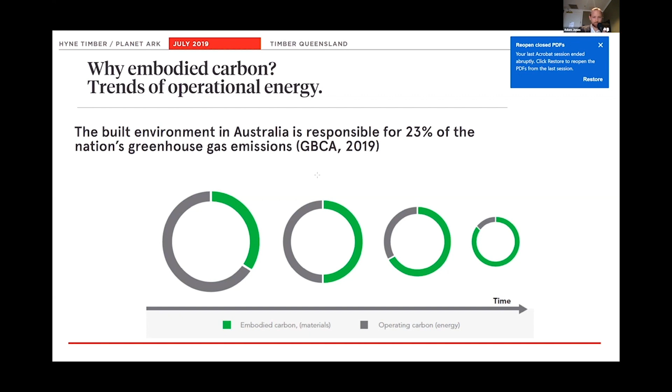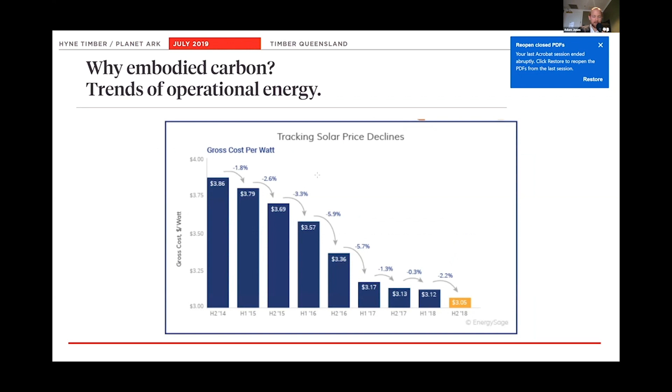So this is another graph just showing the cost of solar going down at an exponential rate, which is allowing for really efficient buildings for energy. And as you can see here, the operations are going down and materials is kind of staying the same, or in some estimates is actually increasing going forward.

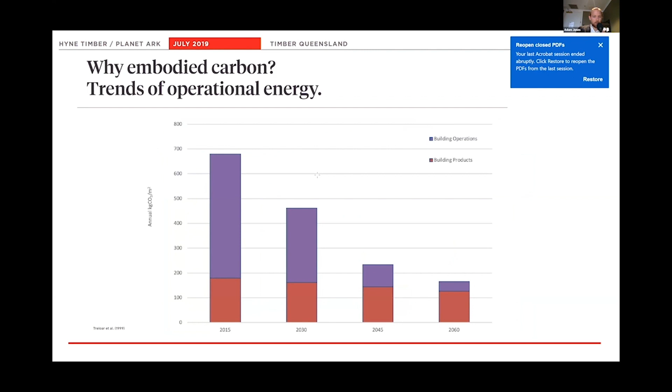So at the same time, we need to find land or build houses for 2.4 billion more people. And as David mentioned earlier, a high proportion of that is going toward our cities.

So in terms of what this looks like, in 2010 we got about 141 billion metres squared. We need in total 133 billion metres squared worth of additional housing. So that's a lot of structural materials that we need to find to house the growing population.

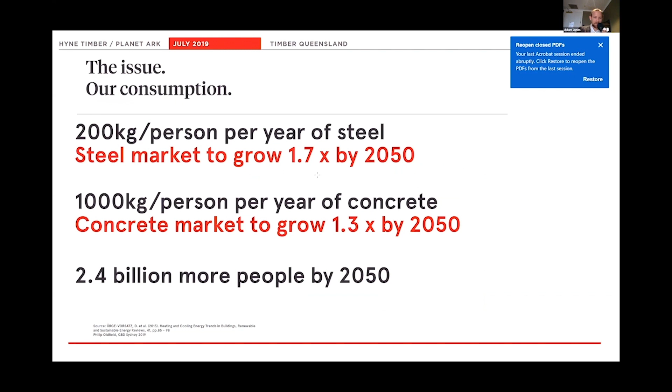So structural materials, it's something that we don't really think about in terms of our own consumption. Steel and concrete is growing at a very fast rate. Every single person on the planet uses about 200 kilograms per year of steel and about 1 ton of concrete per year as well. So we are very reliant on these materials at the moment, and the impacts of these materials are only just going to keep on increasing going forward the way things are moving.

And I think the biggest difference when it comes to solving the problems of operational energy compared to embodied energy and structural materials is that we're getting all the solutions for energy from the sun. Every single second of the day, the sun is giving us more energy than we could possibly handle. But when it comes to our materials, we only have the earth to actually source it from. So this is, I think, going to be where most of the challenge is in terms of sourcing our materials sustainably.

And organisations around the world are beginning to incorporate embodied carbon into their longer term visions when it comes to sustainability. Historically, the focus has only been on energy, but right now they're incorporating embodied carbon into their definitions.

If you look at the context of other materials and what some of the solutions might be to getting to a low carbon future, I think the lowest hanging fruit we should all be looking at is simply designing more efficiently.

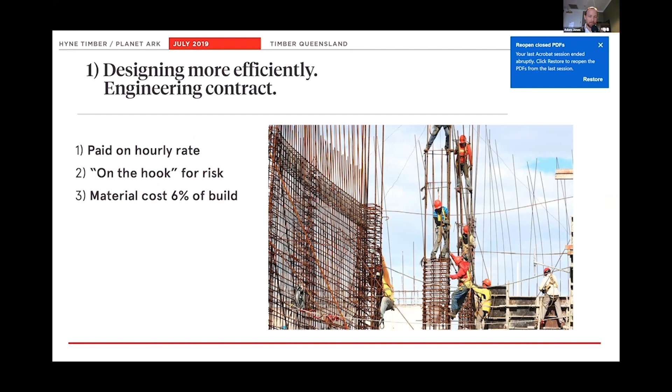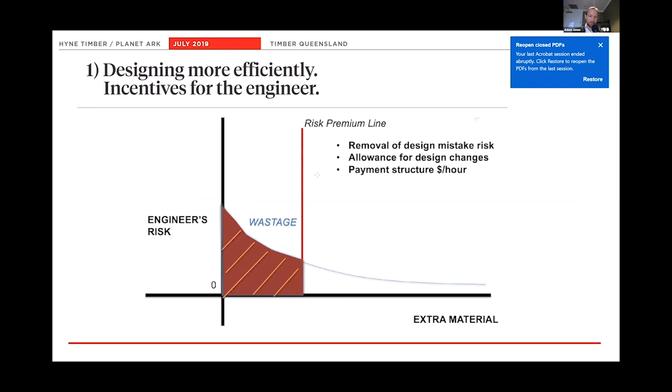As we put more material into the building, our risk as an engineer goes down substantially. And when we account for the allowance for design changes and the payment structure I mentioned, there's a lot of wastage in terms of materials that goes into our buildings.

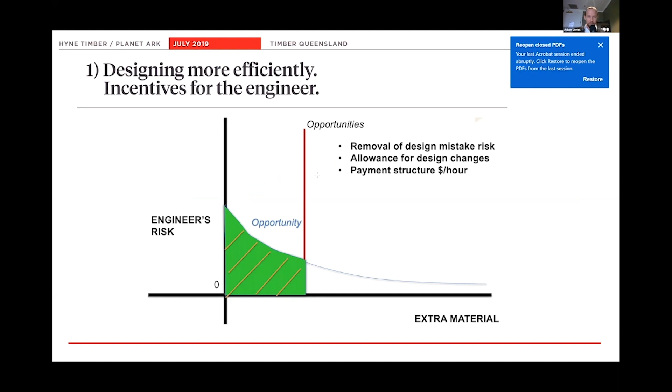At the same time, this is one of the big opportunities, because if we think about utilizing much more computers to do the computations, this is where our lowest hanging fruit in terms of savings can be for our embodied carbon.

Traditionally an engineer would just do hand computations for every single element. With this, you can utilize it to do the design for the engineer, meaning if the architect moves the pitch by just 1 degree, all the computations automatically update.

And timber is in a very good location for this, because things like Grasshopper can speak very well with the CNC machines that cut timber for prefabrication, to be able to deliver it on site.

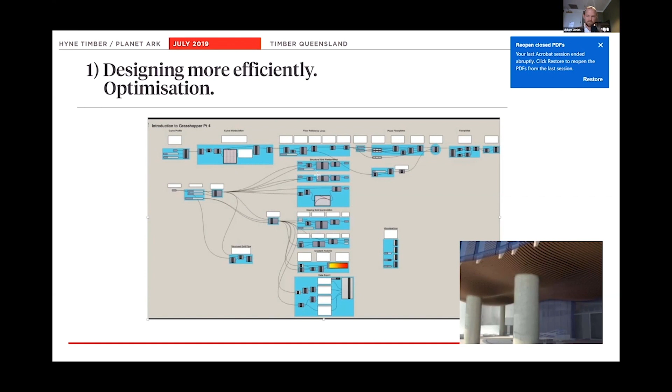When we're looking at concrete specifically, it's 8% of the world's emissions. It's more than the cars on our roads, and we have a huge demand for it, and it's going to be difficult to replace in some elements.

I've got this image here of the future train network of Melbourne, and a lot of these are new railway and new pieces of infrastructure that need to go ahead. On the right-hand side here is another big challenge we've got.

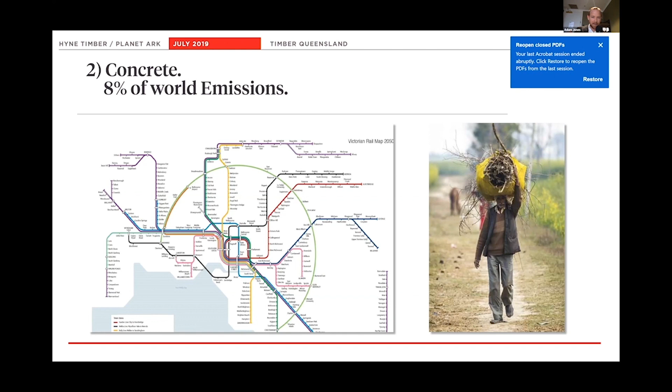Every single time we bring someone closer from poverty to our standard of living, there's a lot more emissions associated with that. I personally feel uncomfortable if we allow other people to live in poverty because they want to aspire to have the lifestyle we have. So this is one of the challenges in terms of the values we need to balance moving forward.

Looking at the chemical reaction of concrete, 32% of it is generated in the creation of heat to turn limestone into lime. And the big one here is that carbon dioxide is released in the chemical reaction, so that's 55% of the emissions.

And it doesn't matter how much we optimize this process of creating concrete, there's always going to be 55% of the greenhouse gas emissions that's released.

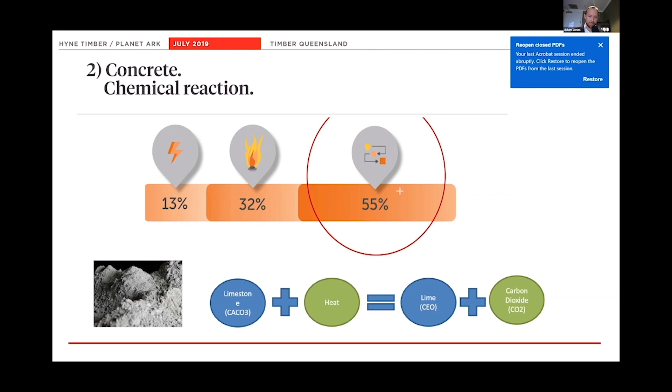So for concrete, which is this big issue moving forward, there are two minor solutions: geopolymers and supplementary cementitious materials. But again, if we're using fly ash, and in Australia, especially Victoria, we've got a lot of fly ash sitting there, these are also non-renewable resources. So these can help to a point, but eventually we're going to run out of the supplementary cementitious materials.

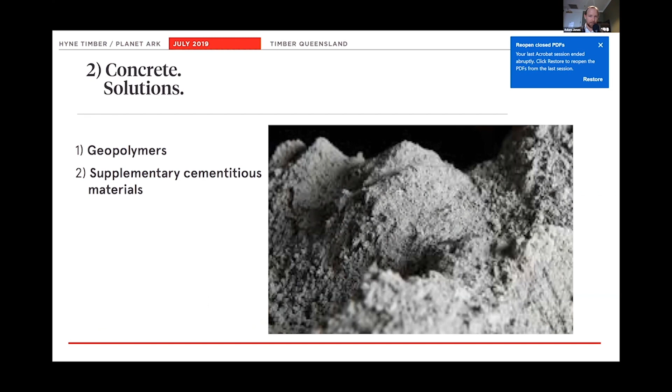And a similar story with steel. With iron oxide, we use heat to release the oxides off the iron, and then CO2 is released again in the chemical reaction.

It doesn't matter how much renewables we use for the generation of heat, there's always going to be a minimum amount of CO2 emitted in the creation of steel, which again goes against our longer term goals of the Paris agreements, or also like the Green Building Council's new carbon roadmap and so forth.

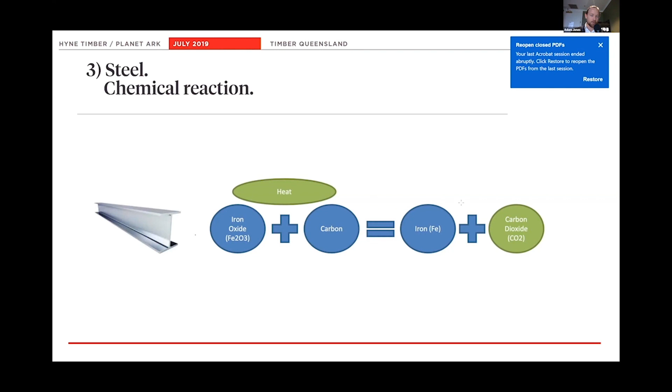So with steel, there's no real significant solutions out there. There's one somewhat speculative, very early technology, and that's using hydrogen to release the oxide from the iron. So then you use iron, and the byproduct's just water instead of CO2.

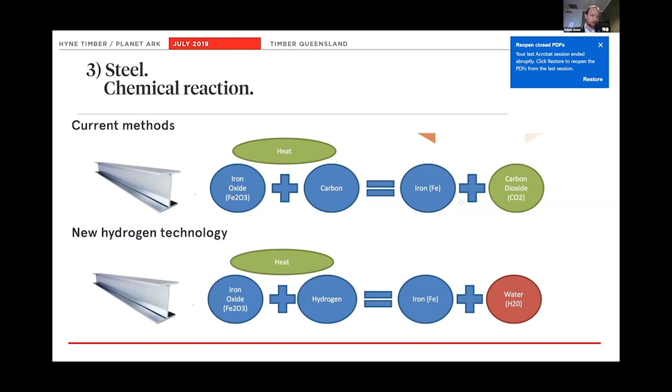So in my opinion, hopefully it gets there. But from a timber point of view, if this goes ahead, this might be the only competitor for timber in terms of getting down to zero carbon.

So I think it was important to look at steel and concrete, because as you can see, I think they're going to struggle with the solutions on offer to solve the problems. As Clarissa mentioned at the start, timber is the only resource that really can achieve the goals in their full complexity going forward.

So if we come back to the chemical reactions of cement and steel, inherent in the reaction we release carbon dioxide no matter how much we optimize this process and make it clean. With timber, the whole chemical reaction equation's entirely flipped. We actually have CO2 mixed with water and sunlight, and then it's stored within the product. So the weakness of steel and concrete is the strength of timber in terms of carbon. And the best part is it releases the oxygen that we breathe and a bit of sugar.

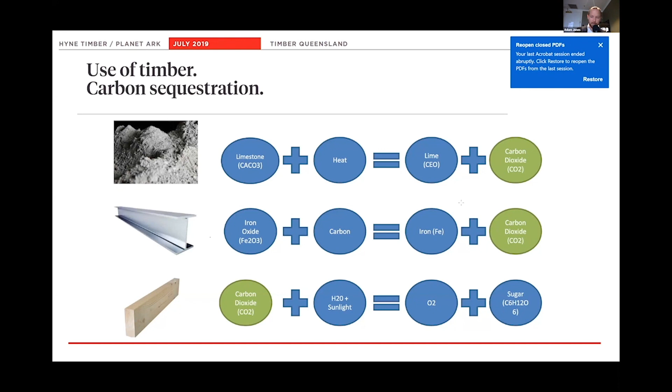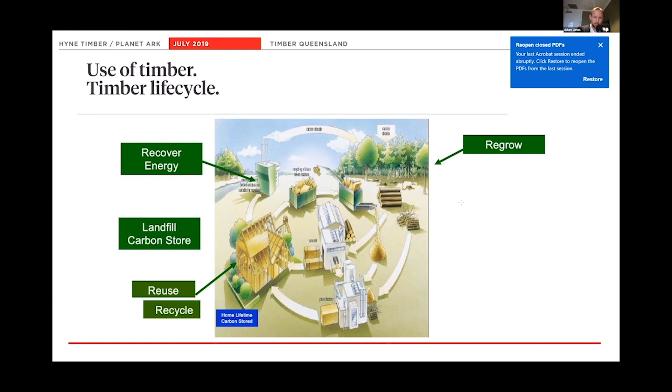For the timber life cycle, think about a softwood tree: if it grows for 30 years, then you turn it into a timber product, you're keeping that carbon stored for those 30 years in the product. As a new tree grows in its place for another 30 years, less than the design life of the building, say the building's there for 60 years, all of a sudden you've got two lots of carbon dioxide stored in timber products and a new tree growing in the same place. So it can be really net positive in terms of carbon sequestration. During its use phase, and toward the end, there are a few different options for the end of life, which I'll cover toward the end of the presentation.

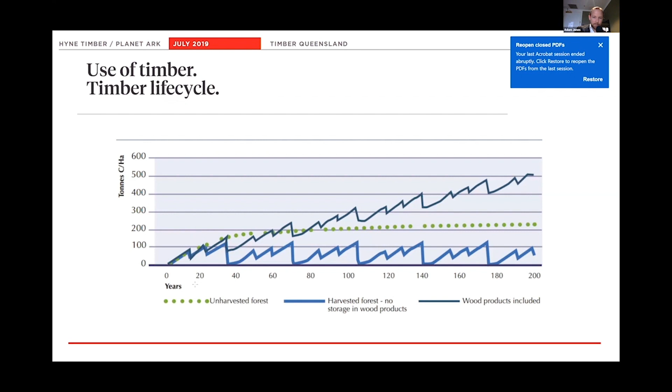It's really important to understand that the whole use of timber is conditionally sustainable. If you cut the tree down and then change the land to a road or some other agricultural use like beef, or in Indonesia palm oil, then it's really one of the worst things you can do. If we cut the tree down after 30 years and don't replant it, it just stays at zero the whole way, as opposed to keeping on growing and storing more carbon dioxide from the atmosphere.

We've got to understand that carbon dioxide is extremely important for the next few decades, but it's not absolutely everything. There are other values we need to maintain, like biodiversity and protecting indigenous land. There's land out there that hasn't been touched by humans ever, and we probably don't want to be tapping into that because it's got great environmental benefits from being untouched. This is why it's important to understand the stamps of FSC, Responsible Wood, PEFC—they look at all these other values as well as the carbon story, to make sure it's sourced sustainably and the product does net positive impact to the wider built environment.

If we look at softwood plantations and how renewable the resource is, we grow 30 to 40 cubic meters per minute, which turning into engineered wood products is 11 to 15 cubic meters per minute. So for some iconic projects around Australia: Forte, for example, it would only take 1 to 1.5 hours to regrow the whole building. For 55 South Bank Boulevard, about 6 hours. For the Monash project in Frankston, about 2 to 2.5 hours. So we do have the capacity to grow our buildings at a very fast rate.

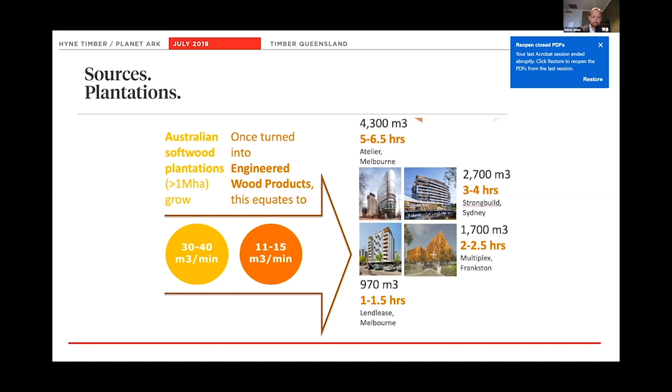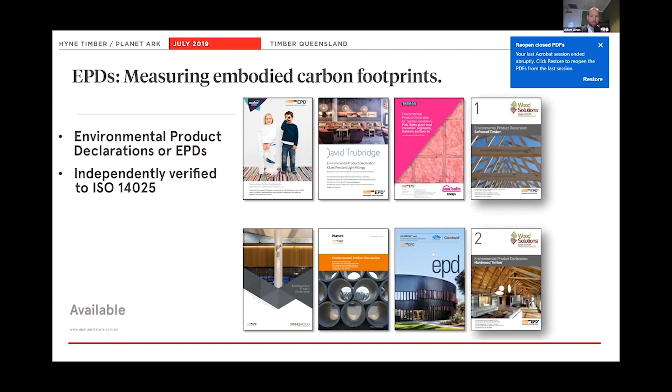Okay, so when measuring embodied carbon, it all comes down to EPDs. If you're not familiar with this, this is a way of transparently identifying the life cycle of a product in terms of its overall impact. You can get these for pretty much every material you come across, if that material is happy to be transparent about how they do their process.

WoodSolutions recently has done 6 EPDs on timber products. You've got softwood timber, hardwood timber, particle board, medium density fiberboard, plywood, and glulam, both for softwood and hardwood.

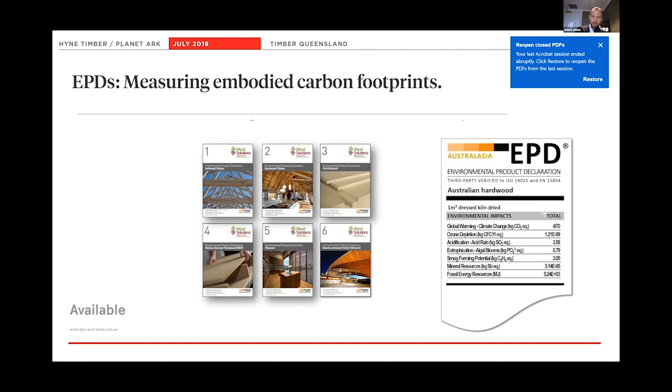On the right-hand side, you can see the different areas of impacts that the EPD measures. There's 7 different ones based on your different values. You might value each one a little bit differently, but most people would see global warming potential as the most important. As you can see here, for Australian hardwood, the global warming potential is minus 670, meaning it's taken in 670 kilograms of CO2 per meter cubed.

Looking at softwood in a little bit more detail: from the forestry, when you take the tree into a timber product, it stores 900 kilograms of CO2. But then there are some emissions when it comes to the processing of that product, right up to the point where it goes onto the truck and onto the building site. The kiln drying in this case is where some of the impacts go, and from what I understand, there are some potential improvements from the timber industry in this middle section to make timber products even better and more sustainable and better for the environment.

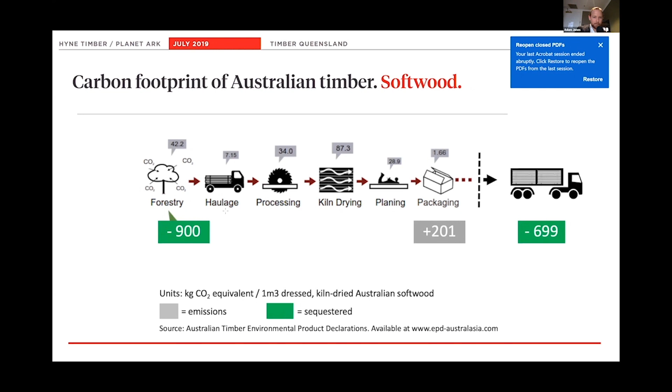Hardwood stores 1,200 kilograms of CO2 because it's got higher density, and all of this can be taken from the Hyne calculator that Clarissa mentioned at the start. Then down to the very end, it also stores 700 kilograms when it's on the truck on the way to the building site.

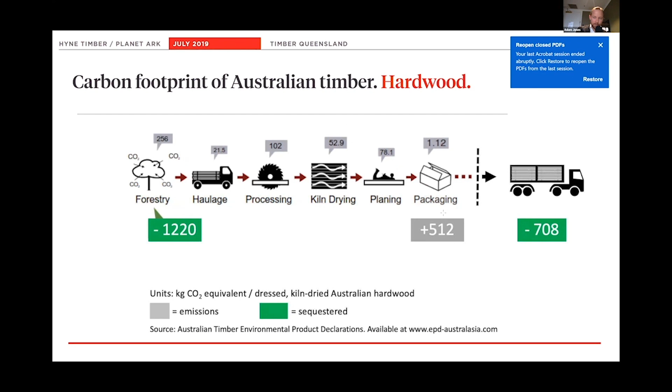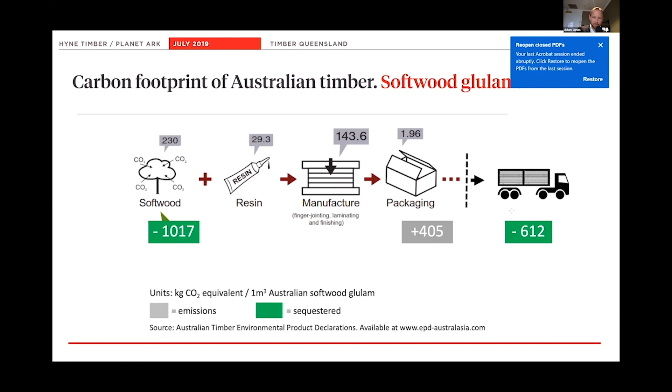For softwood glulam, there's a little bit more in processing in the middle, in the manufacturing of the finger joining and the laminating and so forth, but it stores 600 kilograms when it's on the truck on the way to the site. And for hardwood glulam, with a little bit more processing, it's 400 kilograms of CO2 on the way to the site.

So that was all up until the site. The end of life is something that's really important to be considering. At the end of life, the best option, in my opinion, is to reuse the product in any way we can. To reuse it, we actually want to be using screws, detailing it and designing for deconstruction. With timber, this means avoiding glues in some of the connections, which isn't always the case.

It's something we can be doing a little bit more of. We can recycle and downcycle into other products, but it's still storing the carbon. We can put it into landfill. There's pretty exciting research showing that after 30 years of sitting in the landfill, 95% of the carbon remains inside the product, so it kind of just sits there and keeps storing carbon. There is a little bit of methane that's released inside the landfill, but overall it basically just sits there, which is a really good story.

Fourth, we can burn the timber to use as biofuel. Remember, at the start of its life, it took in CO2; when we're using it this way, we are releasing CO2, but it's producing energy instead of the grid. For Victoria, we've got a dirty electricity grid, so it's much better than that in this case. But there will come a time when our electricity grid is clean and biofuel won't be a good option.

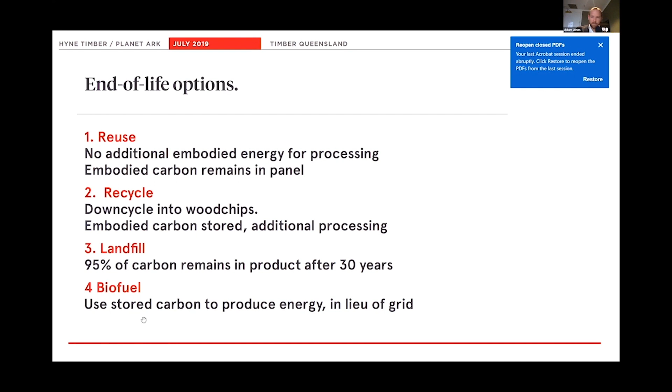Just look at the time.

I think one of the most exciting areas in terms of sustainability is the design for adaptability and construction reuse—building on top of our existing buildings, as opposed to knocking buildings down and doing the foundations and the ground floor and rebuilding from scratch. This is a really exciting area, because timber is 1/5 of the weight of concrete, and all the concrete designed in our cities is designed to the 28-day strength. After another year, there's 20% of additional strength gains in the concrete, and after, say, 10 years, there's 40% more gains. So there's additional capacity in our concrete structures that have been sitting there for a while.

Because timber is so light, all of a sudden we can build on top of these structures. This gives developers an additional option: they can either demolish and start from scratch, or now they can really build on top with timber products.

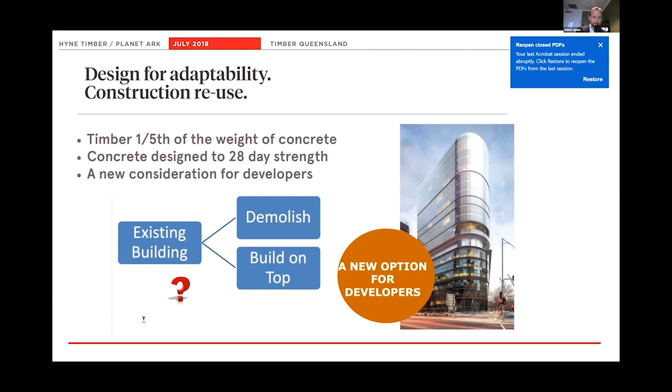So I think that's another area of opportunity for LCA practitioners. Currently, they're not all including carbon sequestration in their assumptions, which I think they probably could be doing from my perspective. So in summary, embodied carbon is becoming increasingly important.

If you're in this area and if you're responsible for materials, if you're an engineer, you might be becoming the most important person in terms of sustainability. Not yet, but with a 10 to 20 year time frame, materials proportionally will be where most of the impacts are.

And timber, as I've covered, and as Clarissa mentioned, it really is the ultimate renewable. If we are going to get to zero emissions, we can't just stop at energy. Once energy gets to such a point, everyone will be focusing on materials. And I think this is a really big opportunity for anyone in this area of timber.